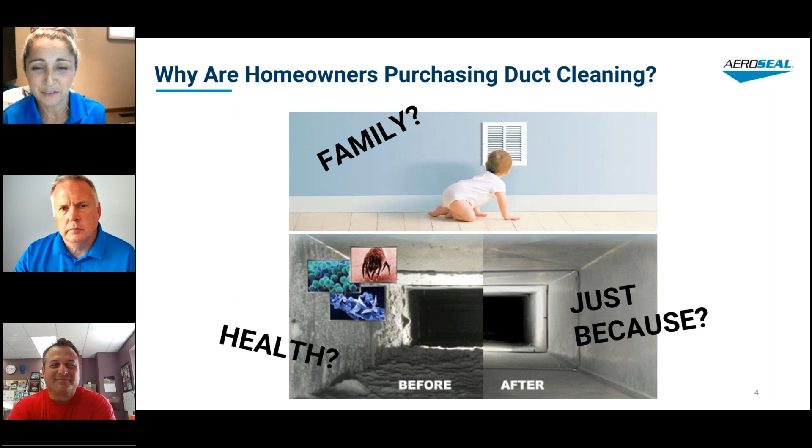So duct cleaning's been around a long time. It's not new, but I think lately, especially lately, it's something that has really gained some new focus. It's more emphasized these days, especially coming out the other side of, well, maybe not all the way out the other side of COVID, but starting to come out the other side of COVID. But if we take a look at some of the information here on the screen, homeowners are concerned because of the amount of time that they spend indoors.

Now, that stat you see that says on average homeowners spend approximately 90% of their time indoors, that stat was prior to the pandemic. So you think about all of the work from home and shelter in place orders that are out there, I expect that number is even higher now, right? But no matter how you look at it, you're spending the majority of your time indoors and you're breathing indoor air. So of course, wanting it to be as clean and healthy as possible makes perfect sense.

And then you think about your indoor air quality, and you have folks who are more susceptible, folks who are older or very young, or folks who have cardiovascular or respiratory issues. And those are also the types of individuals who spend even more than 90% of their time indoors. So it becomes even more important for those types of individuals.

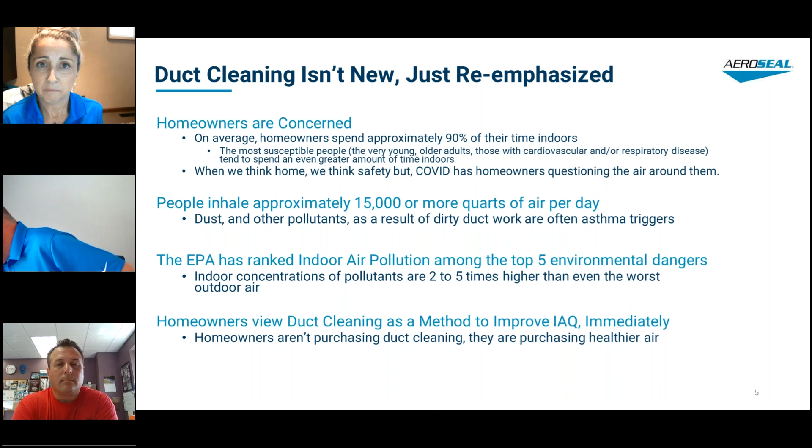And then what's great about duct cleaning is the point that we just made on the previous slide: homeowners aren't buying duct cleaning, they're buying healthier air. And duct cleaning is one of those services that does provide an instant, immediate gratification for a homeowner. As soon as the service is done, you start breathing in, and you've got that immediate gratification because you're instantly breathing healthier air.

So it's not just the dust that's hiding in the ductwork. Although you've got terms like dirty ductwork, and that implies that you've got dust accumulation inside the ductwork, there's a lot more that can be found in dirty ductwork. It can actually attract other things, other agents that are harmful and hazardous.

I was speaking with a homeowner this week who was asking some questions about clean and seal services. And she said that she was doing some investigating in her home, and she literally found a shoe, a child's shoe in her ductwork. And then she said, and I don't have kids. So she didn't know where the shoe had come from, probably a previous homeowner. We've heard other homeowners talk about raccoons that get into the ductwork and don't make it. So they crawl up in there and then they just die.

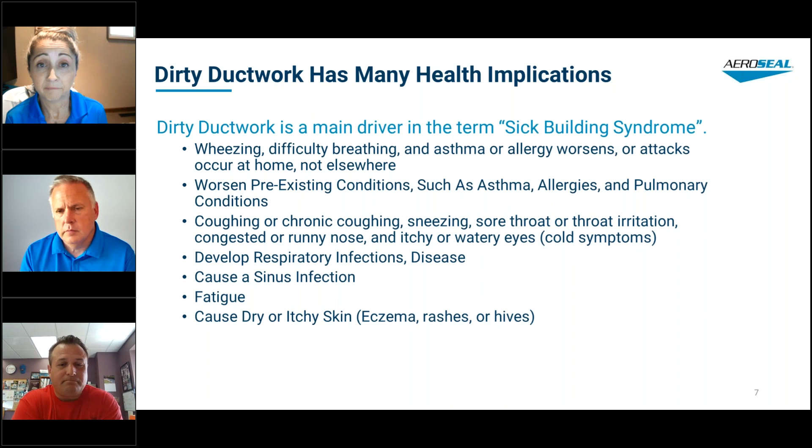And you know, IAQ, it's a big motivator for me, and I think it's a big motivator for homeowners everywhere. But it's not just about IAQ. And when I say it, I'm talking about dirty ductwork. Dirty ductwork doesn't just create poor indoor air quality. It can create other issues, like it can put a restriction on the airflow inside the ductwork, and that can have an effect on the overall circulation or distribution of air in the duct system and then throughout the home.

The dirty conditions inside the ductwork can actually put a burden on the HVAC equipment, and it can shorten the lifespan. So it can create buildup over time, and then those really important, really expensive internal components like the coil and the fan, it can clog them up, and then you got to replace them or the whole unit sooner than anybody ever wants to. Because I don't know many people who are excited when they have to replace their units.

It can also cost a lot more to homeowners in terms of maintenance. So if you continue to ignore what's hidden and you continue to leave your ductwork dirty, then you could be forced to upkeep with your filter exchange much more often. Or you have to schedule more frequent maintenance on your AC and furnace.

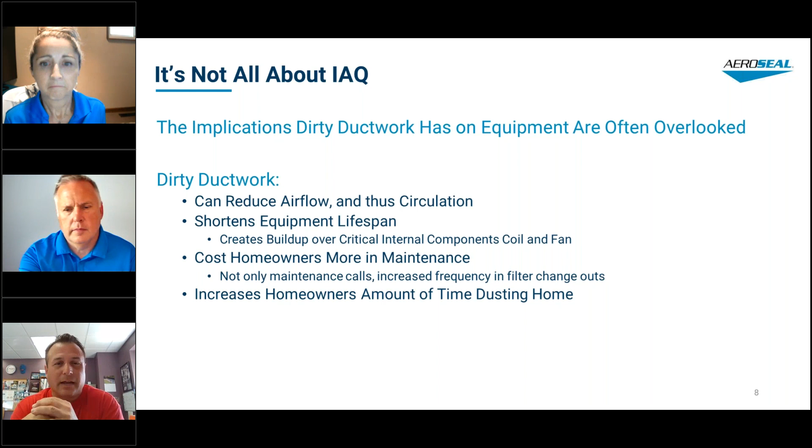So we made this point a few slides back, but duct cleaning is fantastic because it offers instant gratification for your customers. They can see a difference, and I'll let both Mike and Tom tell you about how you can show them the difference. But you see this picture down here. This is a classic before and after of a dirty duct and then a clean duct. So it's easy to show a homeowner that thing that they may not have looked at, but you can bring the attention to them.

They can smell a difference. Dirty ducts can lead to unwanted odors in the home. So the first time you start breathing in that cleaner air, your house smells fresher. And then feeling and experiencing a difference, that of course is key as well. So Mike, why don't we start with you? Speak a little bit about how you see duct cleaning as the kind of service that provides instant gratification.

I think you laid it out here perfectly. And the first point you make is seeing the difference. And people see the difference in their environment after we leave in the coming days and weeks. But taking pictures inside the ductwork, that's a must in today's industry. Every one of our jobs, we're taking pictures to not only document this for our own records, if you don't document it, it didn't happen, but to show the customer it's proof that the ductwork's now clean. And some of these shots are so dramatic, they really make great marketing tools too.

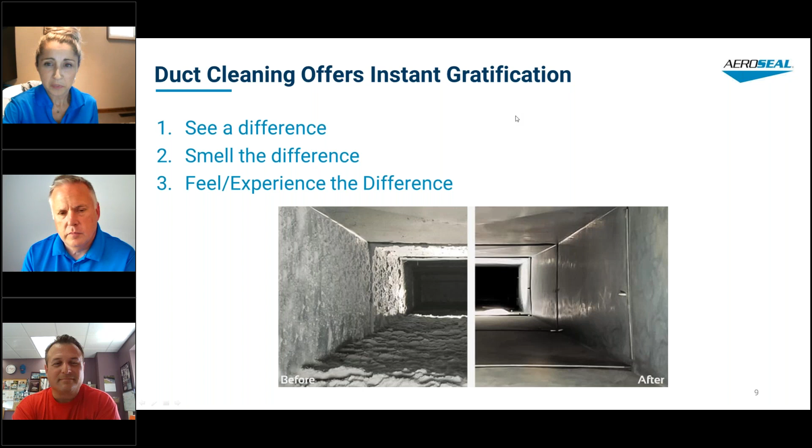Oops, sorry about that. So moving on a little bit deeper into the topic here. We opened up the presentation by saying we're going to talk about clean and seal. And duct cleaning is one part of the solution. We want to look, though, at the bigger picture, the larger issue at hand. Why is the ductwork dirty in the first place? Is it just a naturally dusty environment? Is the homeowner a DIY kind of homeowner?

They're doing a lot of home improvement projects like sanding hardwood floors or lumber cutting. Who knows? But maybe they do a lot of do-it-yourself type projects inside the home. Or do they have some significant duct leakage in their home that can be adding to the indoor air quality issue? And we know that in most cases, most homes do have duct leakage.

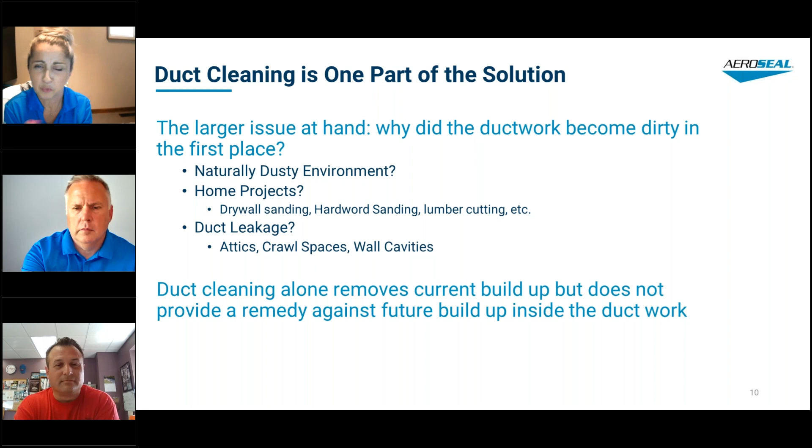And take a look at the final point here on this slide. Duct cleaning alone removes the current buildup, but it doesn't necessarily provide a remedy against future buildup inside the ductwork. But let's keep talking about it, because I don't want to mislead. Duct cleaning and duct sealing work awesome together. We need each other. It's not that one's better than the other. It's just that we work really well together. So that's what we're talking about.

We're talking about why duct cleaning and duct sealing as a bundle service, a clean and seal type service, is such a great opportunity. So let me just run through these points quickly, and then I want Tom and Mike to talk about this in much more detail, because they're the experts and they're the ones out there having success with it, making money and making homeowners happy with their clean and seal services.

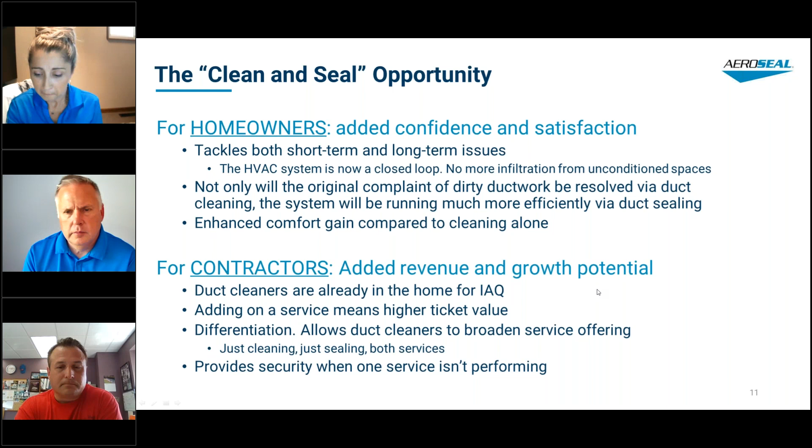So Tom, I'm gonna take what you said and I'm gonna revise the way I present this information. We said that dirty ductwork is about more than just air quality. And we were saying it's also about efficiency, but I really kind of like the way you just said it. It's about capacity. So I'm gonna walk you guys through this slide quickly, but before I do, I'll give you an analogy to kind of explain what we mean.

HVAC equipment is designed to operate at a certain efficiency, and it's labeled with a SEER number, right? The higher the number, the more efficient the system is. And we like to say it's kind of like miles per gallon. So let's say you buy a car and it's advertised and designed to be a car that operates at, we'll say, 70 miles per gallon.

Okay, but let's say that car has holes in the gas tank. You're never going to get 70 miles per gallon out of that car, right? There's nothing wrong with the design of the car, the motor, the engine. It's designed to be efficient. It's designed to achieve 70 miles per gallon. But until you address the fact that you have holes in the gas tank, you're not going to be able to get that capacity out of the car, right?

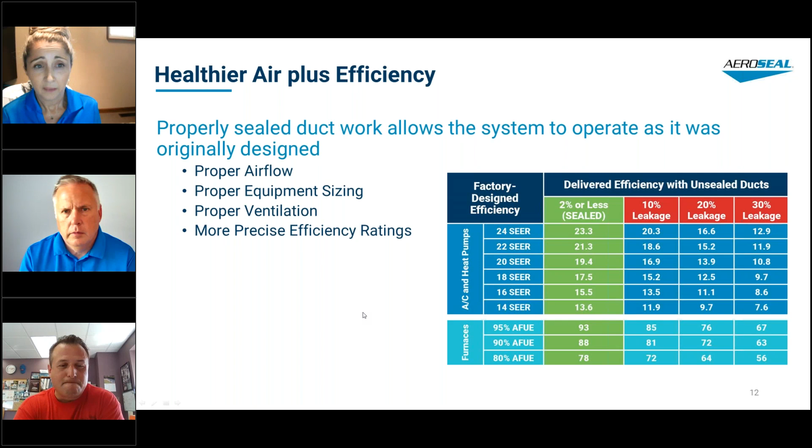Okay, so moving into duct sealing a little bit here. Duct sealing is not something that has always been required. In fact, up until about 2009, there really was no code enforcement across the country for duct sealing. But since then, codes have become very stringent, and in many places the code requirements are for such duct tightness that it's tough to achieve by hand. And so we're starting to see pockets of increased activity in terms of Aeroseal duct sealing, because it's just hard to get there by hand sealing.

So what does that equal in terms of the number of homes? We're talking about 115 million homes. So what does that mean? What that means is there is no shortage of opportunity out there in terms of duct cleaning and sealing, right? Tom's shared with you the number of seals that he's done since he's been part of the network, but he's not running out of opportunity anytime soon. It sounds like a really big number, but Tom, there's a lot more to go around in your market, and there will be for quite a while. Would you agree?

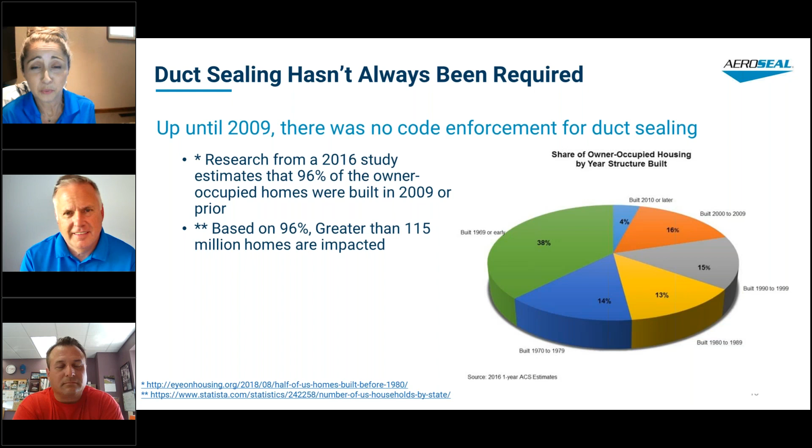And then if you ask the same question, what percentage of people have the air ducts cleaned, it's only about 2 to 3% at 330 million people in the country. So a sliver of that would be the people who have or are planning on having their air ducts sealed. So there's such a market out there, and the duct cleaning market with 2 to 3% is a $1 billion market. So there's so much capacity and so much untapped demand out there. It's just amazing. Yeah, wow. Thank you for sharing that. I don't know that I knew that statistic, and I'm a little bit surprised to hear that. That's a really powerful point.

Okay, so duct sealing isn't your thing. We'll try to give you a little bit more to think about then on that. So Aeroseal solves the learning curve for duct sealing. What do we mean by that? What we mean by that is there are other ways to seal ductwork. You can seal ductwork by hand using mastic or tape, but we say it's an art. It is something that takes time to become proficient and effective at doing. And the other challenge with hand sealing is unless you have other tools on hand, there's no real way to know how effective you are. You're kind of guessing to some degree.

With Aeroseal, you have a computer that is monitoring minute by minute the improvement that you're making. And so you can watch the progress of the sealing, and you know how effective you are at sealing up the ductwork. Where with mastic and tape, in some ways you have to wait until the test. So that can be a bit of a learning curve with the hand sealing approach. With Aeroseal, you know before and after, and you don't have to struggle with the hope that you've made an improvement. I mean, you're making an improvement either way, but we'll talk a little bit more about the process, and I think it'll make more sense in a minute here. So Aeroseal brings flexibility and efficiency by turning an unpredictable, manual task into something more consistent and dependable.

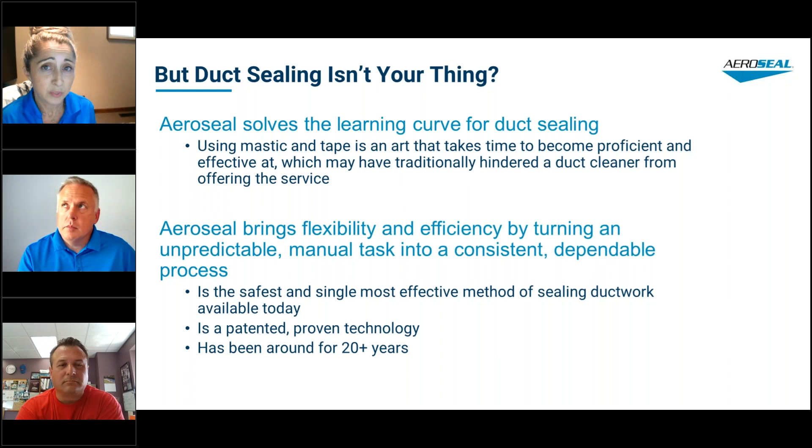So Aeroseal, we describe it as the safest and single most effective method of sealing ductwork available today. It is a patented and proven technology. It's been around for 20 plus years, so it's not something that we just started doing. We know it works. And Aeroseal improves customer satisfaction in so many different ways. It targets one of the reasons that ducts get dirty, and it provides a root cause solution. The leaks in the ductwork can add to the reason that the ducts are dirty. And so by using Aeroseal duct sealing services, you're sealing those leaks, and you're preventing one of the reasons that ductwork gets dirty. You're blocking that entry point, and you're providing a more permanent solution.

And then, you think about all of the benefits that Aeroseal packs in one punch, and there really is no other product like it out there. So what we mean by that is Aeroseal can improve comfort in a home. Mike talked about this earlier. Humidity. Humidity is a huge issue.

When we're talking about comfort, really, humidity is that factor that people don't always think about and don't always talk about, but humidity is what makes all the difference in the world. It's not so much the temperature, it's the humidity that makes us the most uncomfortable. So again, you heard Mike talk about leakage on the return side of the duct, pulling in really humid air.

For those of you who know who Ken Summers is, there's a statistic that he talks about very often, and I've heard it many times, so I can share it with you. Just 100 CFM of leakage, which is not a lot, and Tom and Mike can tell you that's not a lot. In most cases, we're seeing a lot more leakage than 100 CFM, but just 100 CFM of leakage in a return duct system can add 10 gallons of water to the duct system in a 24-hour cycle.

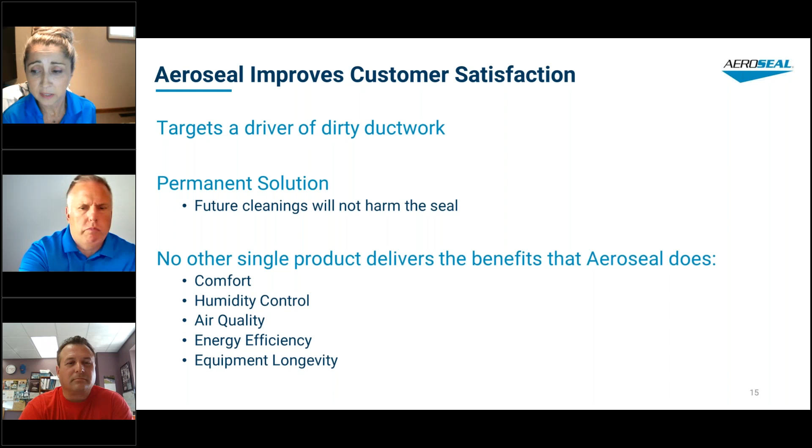Aeroseal redefines duct sealing. So the way our technology works is it seals the ductwork from the inside. And it's great because it has no limitations. So with hand sealing, you can only seal what you can reach. And I have little arms, so I wouldn't be able to reach very much. But Aeroseal can access all of the leaks. The leaks in the ducts that are hidden behind the walls, in the floors, or in those just really hard to reach places. So no limitations in terms of access, because we're sealing from the inside.

And then in terms of how big of a hole can we seal, we can seal holes up to 5/8 of an inch. If you start running into holes that are bigger than that, we're going to recommend that you seal it by hand first. And it's kind of a trick question. We can seal holes that are bigger than that. It just becomes difficult to control the sealant, right?

So the other big benefit here is that Aeroseal, when used in places where you have duct tightness codes, you don't have to worry about passing that inspection. We're able to achieve, and in most cases, surpass code requirements on the first attempt. There's no going back a second time because at the end of the job, you know how tight that ductwork is. And then I think you heard Tom talk about it earlier.

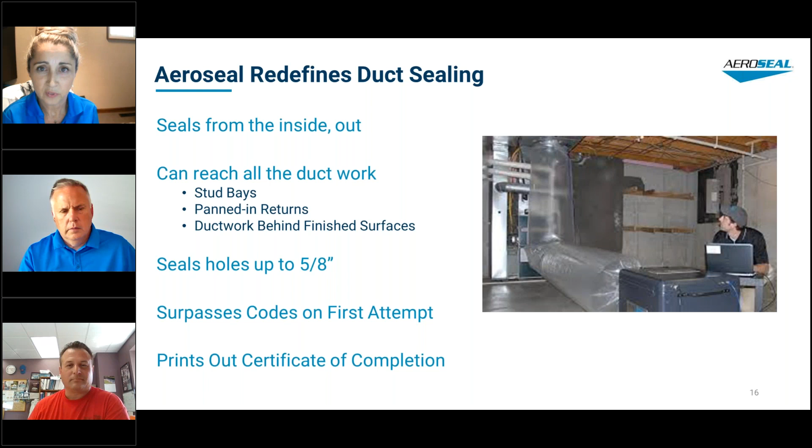We're able to print out the proof of the work that you've done. So you're able to show the before, the after, and the minute-by-minute sealing data on a certificate and hand that certificate to your customer, which is really cool because now they have tangible, verified proof that you've made an improvement for them in their home. And I think we have an example of what those certificates look like in just one more slide here. I'm going to go kind of fast on this because we're getting close to the end of the presentation, and I want to make sure there's enough time for Q&A.

You heard the gentleman make this point earlier. The prep work in terms of duct cleaning and Aeroseal are nearly identical. There's a whole lot that is the same. So in both cases, you have to prep the house with foam blocks. You have to block off the registers. You have to block off the coil and the fan. In most cases with duct sealing, you're making an injection point. You can use that same injection point to connect your plastic tubing. We call it lay flat tubing. You can use the same injection point that you're using for duct cleaning for Aeroseal duct sealing.

And Mike and Tom, I'll call on you guys real quick if you want to expand a little bit on the time savings, the labor savings that come into play when you're able to share some of that prep work for your clean and seal services. Why don't we start with Mike? I think it's pretty self-explanatory. I mean, you already are doing a lot of those steps, and especially if you're doing a same-day project, Tom touched on it.

You're already prepped. You do a duct cleaning, and you're already prepped halfway or more for doing a duct seal. One of the additional steps is putting the foam blocks in, but if you know that you're doing a seal, you could do that as part of your cleaning. We're in a lot of cases taking the registers off already. We're using our grill mask product to seal vents and things. So those are already part of both processes.

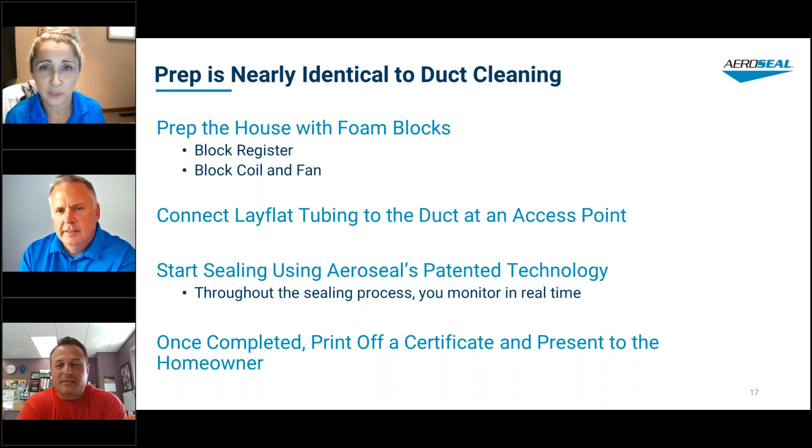Great marketing tools. They provide proof to the customer that their home has had this verified improvement, and we know that we're doing the job the right way. So it's really great to have everything documented as you're going along. It's minute by minute. It tells you how we're improving as we go.

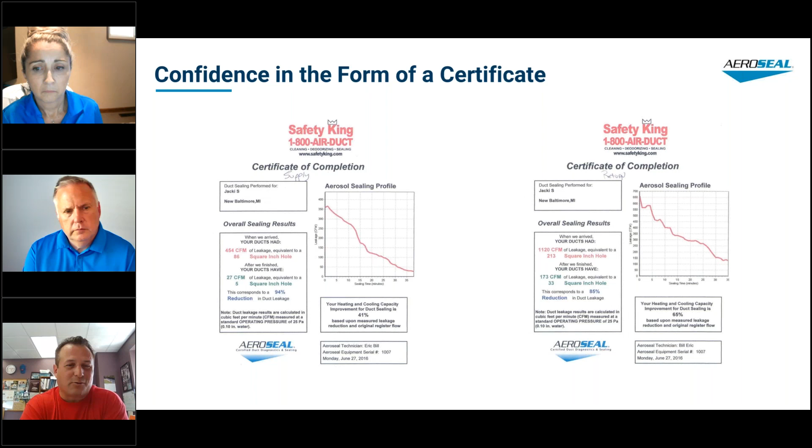I can't speak enough about this. We carry around a book of seals, and it's one of the things, along with pictures, that we show to prospective clients, and it's like a picture. It speaks 1,000 words. Yep, awesome.

All right, so let's wind it out here. Duct cleaning and duct sealing, it's the ultimate duo, and we should have just changed this to what Tom said. It's like the appetizer and the dessert, instead of just eating the entree all by itself. The combination offer of duct cleaning and Aeroseal is helping contractors across the country recover lost revenue, increase their average ticket sales, provide more service options, maintain, even boost their revenue during those slower months throughout the year. It's a big differentiator for your business, and we've talked a lot about how it increases customer satisfaction.